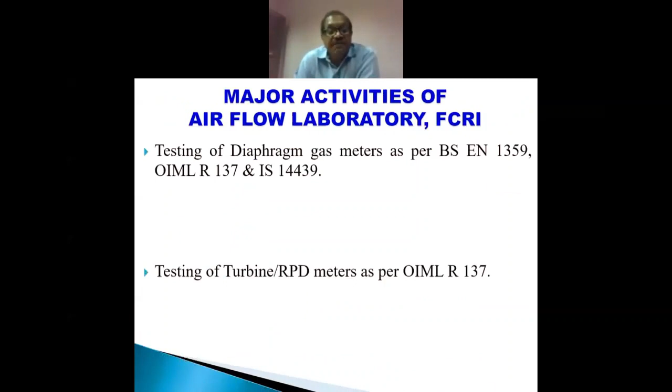So I'm sure most of you must be aware of FCRI, Fluid Control Research Institute, Palakkad in Kerala, one of the southernmost states in India. They are pioneers in fluid flow measurement and calibration activity. This was set up with UNDP aid in 1989, and by that time there were no reliable experts in our own country to make a setup regarding fluid flow. So this was set up with UNDP assistance and Government of India assistance, and we started functioning in calibration and testing of various types of flow meters.

So we have many different laboratories in different media like air, water, and oil in liquid medium, and at present air in gas medium. We are developing something in natural gas also, but it may take time because of some unexpected hindrances in the development. It is slightly delayed. Coming to the airflow facility, we are one of the best facilities available in our country, experienced by many of our colleagues from different manufacturing units, users, flow meter developers, end users, etc. Most of the manufacturers have already used or are using our facilities.

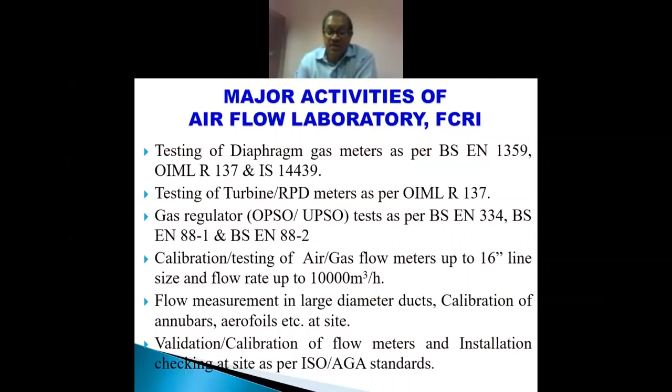We do validation and calibration of flow meter installations, and if any specific problem is identified by any user at the site or manufacturer after installation, we extend our service to resolve those issues from field study and then develop metering techniques suitable to that particular application. So many such installations have been done, installed, and validated. So these are some of our areas of work.

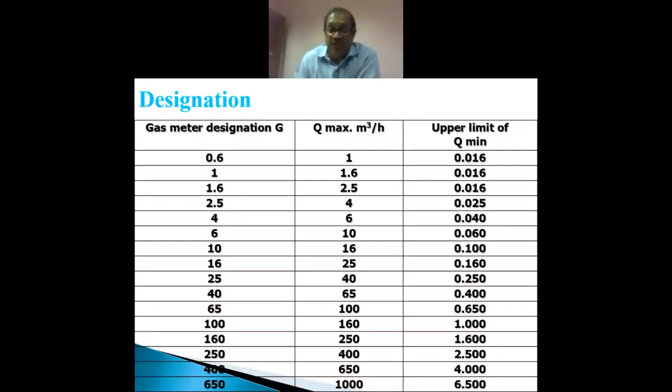Coming to domestic gas, we did the first model approval almost 20 years back. Unfortunately, the first few companies who took model approval from us are not in the field now. Diaphragm gas meters start from G0.6 to G650. But as many of our experts told, in present Indian conditions, G1.6 and G2.5 are the most populated ranges. And earlier, G4 up to G25, G40 was also being used in industry. But considering the accuracy, it's slightly inferior to some of the new technologies, and slowly some industries have shifted to rotary type meters, considering the better accuracy and higher operating pressure.

And why is a model or type approval necessary? That is, if any manufacturer produces any new meter, how to give confidence that that particular model is capable of metering to the national or international levels of accuracy, and that the government body can accept that manufacturer.

So the Indian government does not directly have any laboratory. So they depend on other laboratories to do the testing, and after the test they share the certificate with the approval agency, the government agencies, and based on the certificate they accept that particular model.

So new models and upgradation of models keep on happening, and once any changes are involved, a new technique is adopted or any attachment is there, it should be validated through proper tests. And our present Indian standard does not cater to many of these stringent tests which are covered in some of the foreign standards.

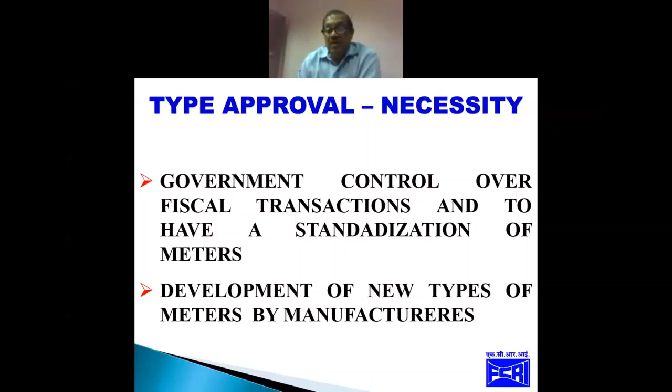Presently we have IS standard 14439, which is under revision now, and OIML R137 and BS EN 1359. OIML R137 is a general recommendation for all types of flow meters which depend on different principles of operation. And the IS standard is typically focused on diaphragm type meters, and EN 1359 also focuses on diaphragm type gas meters.

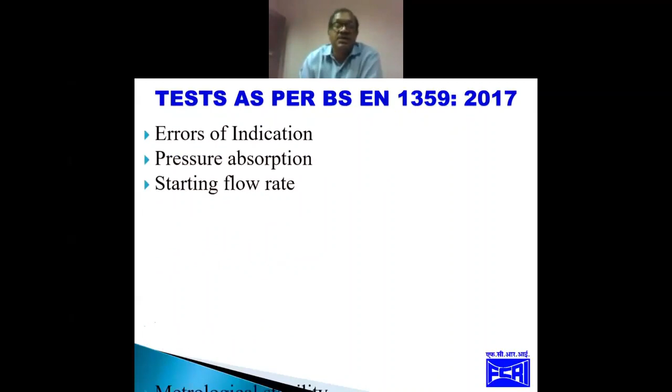So if you compare the old Indian standard and the BS standard, the BS standard recommends many more tests which are more realistic to the operating conditions than our Indian standard. And now I congratulate BIS for making a revision to the standards, so that our standard is also on par with the standards the developed countries follow. So we are in the process of upgrading many of the standards, and we are happy that we could also take part in this aspect in 1359.

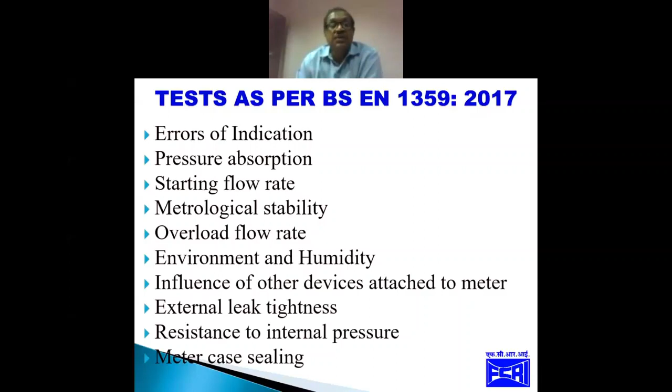So basically it covers error of indication and many tests which were described by other panelists earlier. The first two or three model approval tests we did were not based on the Indian standard; they were based on the EN 1359 standard.

At that time itself, the manufacturers had the feeling that following the developed, acceptable standard, which may be superior to the national standard, would help them cater to the future also. That was, I think, at least 18-20 years back. After that, they withdrew from the market due to many reasons, and now many manufacturers are available in India. They import the whole unit directly or import the components and then assemble here.

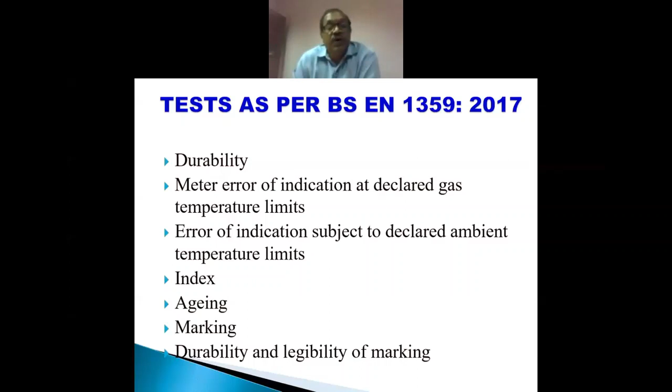However, whatever the procedure, the meter produced should be validated by an Indian agency. Now, apart from FCRI, there are a few more laboratories capable of doing this test. These are some of the tests we do, and these are for EN 1359. EN 1359, being exclusively a standard for diaphragm gas meters, covers many more tests.

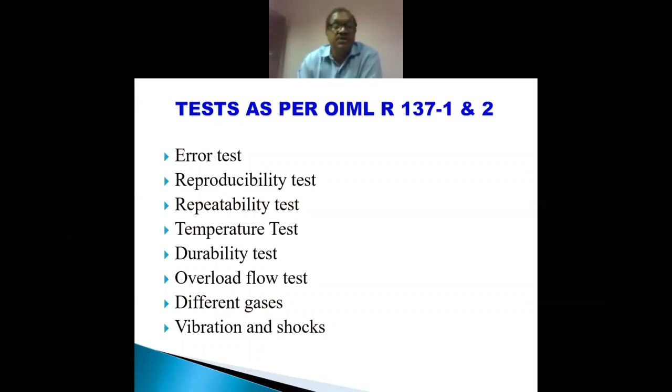These are the tests FCRI was serving earlier. Of course, we don't claim that all the tests recommended by the standard can be covered by FCRI. We cover most of the tests related to flow and related areas, and for the remaining few tests for casing, metallurgy, rubber and casing components, they have to depend on other laboratories to get certified and then submit all the certificates together to legal metrology for acceptance.

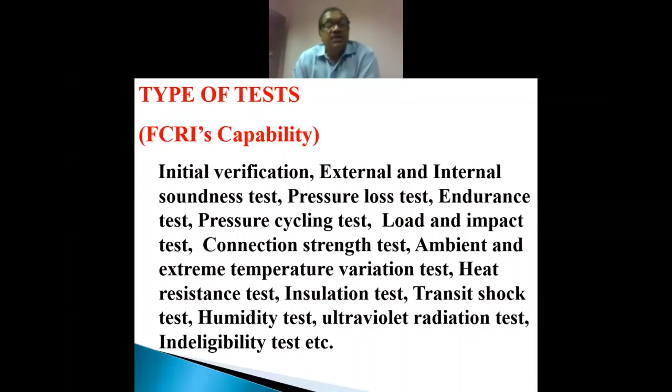Basically, the ambient temperature requirement as per the EN standard compares 4 temperatures: where the meters are kept for testing, the ambient temperature, the temperature of the fluid passing through the meter, and the temperature in the reference standard. Across all places, the temperature should be within 2 degrees centigrade, and variation in ambient conditions over a period is 4 Kelvin per 12 hours and 2 Kelvin per hour. But at present, FCRI is capable of maintaining the temperature within 0.5 degree centigrade throughout the test, at the meter, the reference system and where it is stored.

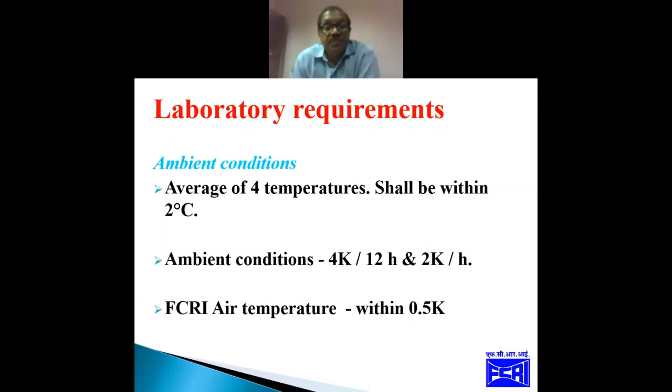The bell prover is one of the best reference standards, which is also covered by the EN standard. We have a bell prover of 500 liter capacity, and now the claimed CMC is 0.1 percent. When it was supplied, it was 0.2 percent, and we improved the accuracy by changing from a mechanical scale to a digital scale and a better calibration method for determining the volume. The accuracy has improved from 0.2% to 0.1%.

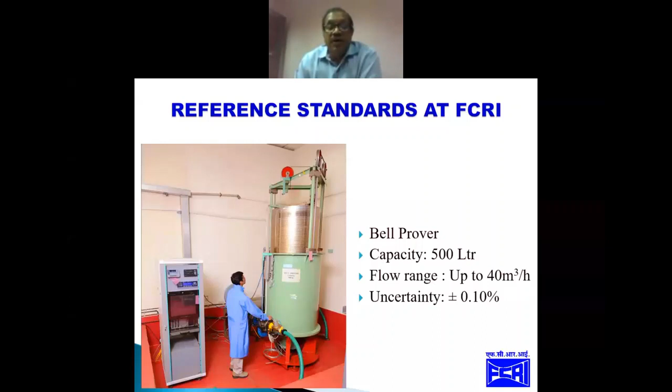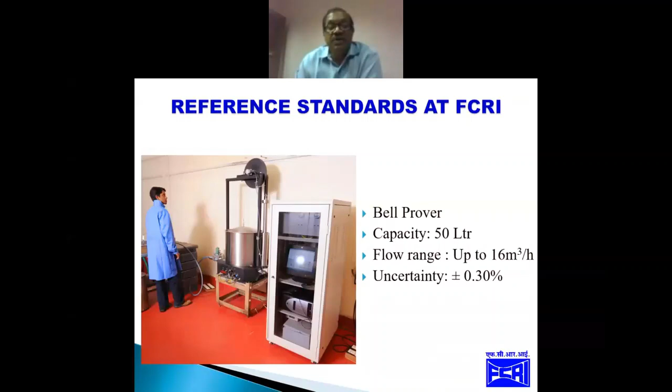At the lower range, we have another bell prover, but its accuracy is slightly inferior, 0.3 percent. And for very low flow rates, we have a piston prover, which is 0.2 percent, and the flow rate can come down to 0.0012 cubic meter per hour.

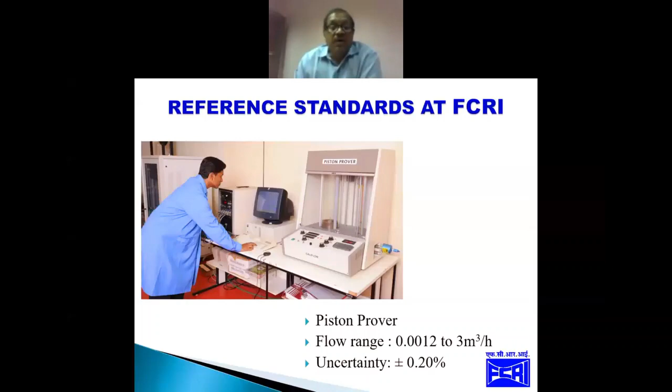And for testing, endurance test and all, we have a small test bench which is developed in FCRI itself. We can accommodate 10 meters in series. And in this one, we can connect a bell prover or we can connect critical nozzles. So different standards can be connected depending upon the flow rate that is required, and we'll select accordingly. The test bench.

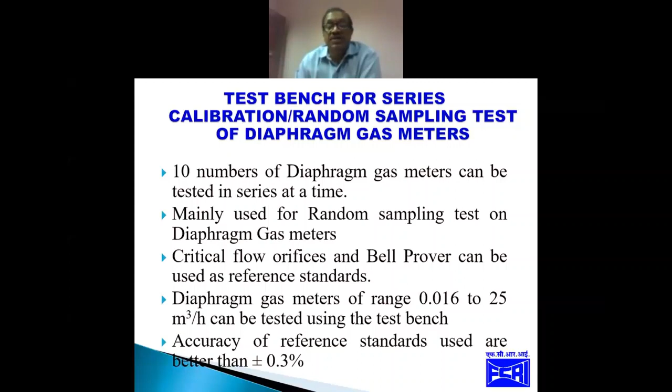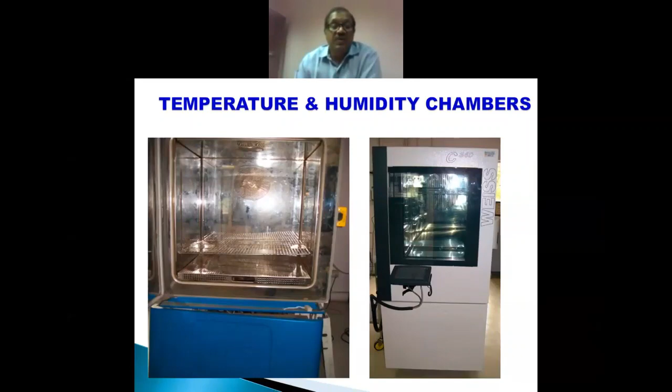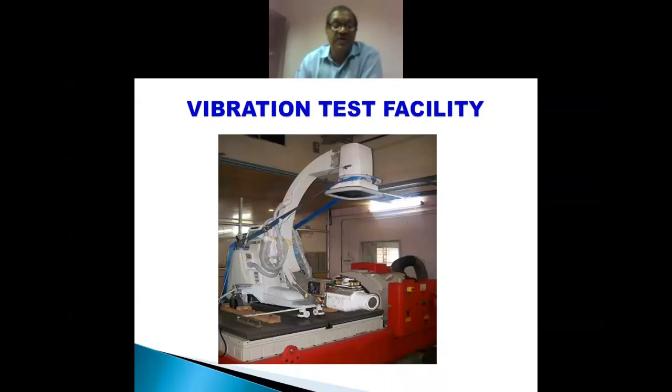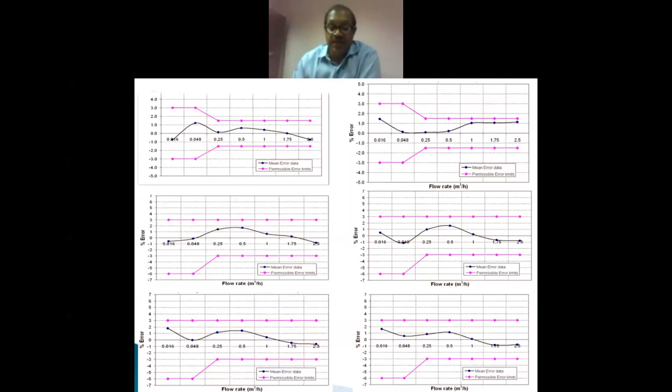This is one particular result I want to share, because the standard says the accuracy over 6 continuous cycles of operation. So how the error curve can vary will depend upon the manufacturer or model. So 1, 2, 3, 4, 5, 6, you can see this is a particular result we have observed. Though the accuracy pattern is different, it is within the acceptable limit. This is very interesting for the manufacturers or developers, how it can vary, and that will help to select the material of the diaphragm, hinges and counters.

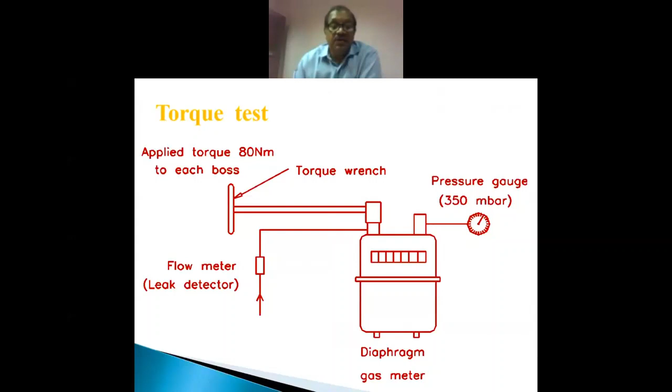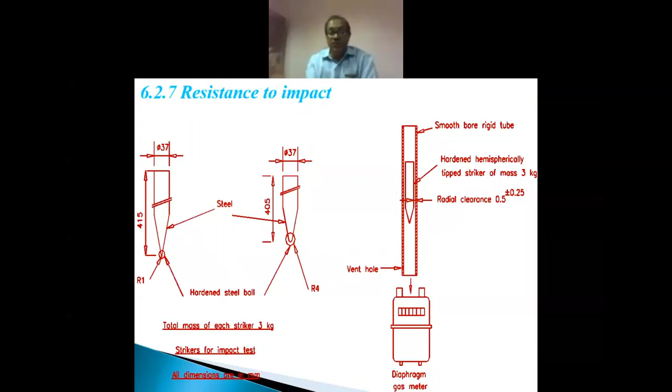And then we do the torque test. So these are all relatively simple tests. We can have the torque test and bending moment test, resistance to impact. These are all the things we developed in the beginning, because we were also very new to this requirement, and all of a sudden someone approached FCRI that we want to have a model approval, as in our country implementation of standardization has been started.

So earlier it was imported, and then our CGD, the pioneers in that field, would deploy the meters, and over a period of time our nation wanted tested and validated flow meters, and when they approached, everything was developed within our knowledge of what is to be done. So every time it is a new challenge for us to devise it and then test it. And one of the manufacturers failed the impact test 2 times; the third time he could pass that particular test.

So that time it was really interesting, and why that test is so important, because many people asked me why that test is very important. So after doing the test, initially the manufacturer also could not believe it, since he was also following some international standard, but due to the type of material he used, 2 times his product failed in that particular test. Only the third time could he succeed, by changing the materials.

So this is showing how important a standard is, and the test criteria also: how our manufacturers, users, our law-making agencies make a particular law a standard, how the manufacturer deals with the standard, and what an end user expects of a standard. So without this testing and experience, we will not be able to understand many of the requirements in the standard, whether we should follow it or not. So really it will help us to improve and reach a higher level.